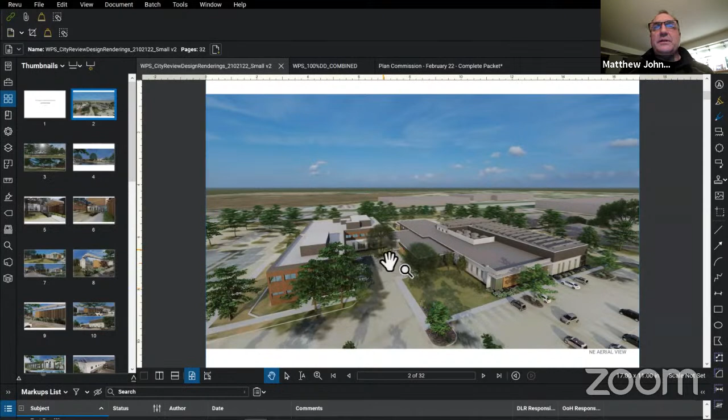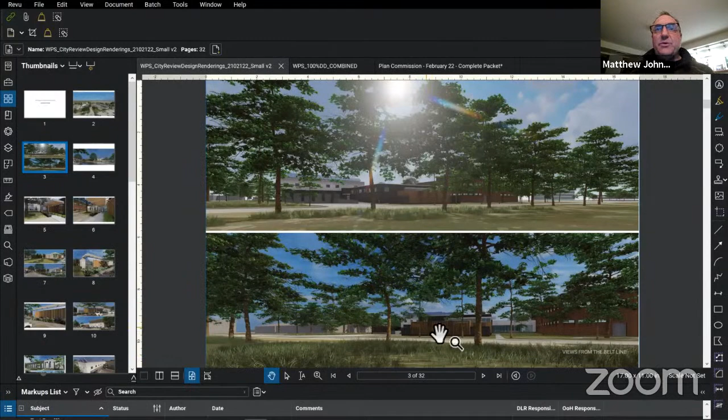As you come all the way to the south of the building, this is kind of standing in those storm ponds to the south across the road, looking at RKB, the imaging portion of the building, and then the central docks. You can see the dock and how it's screened by the trees, roadway, and other materials of the project.

So as you come back to that front north side, the front door, coming in the parking lot from the north—that's the link connecting RKB to the front door. That's the scanning portion of the program for the building, and the solar above that.

The front door itself - this product's called Knotwood. It's an aluminum wood, or a wood image clad on aluminum panels, if you would, or aluminum sticks. And then this is aluminum siding on top of that concrete tilt-up panel.

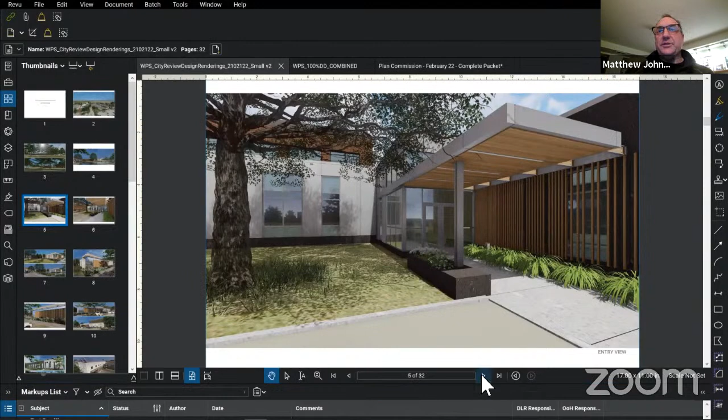This is a secured entrance point, that canopied entry looking back at RKB. So as you're backing up towards the south, the front door or side door, this is the scanning center - this is in the future master plan. This side of the building of this addition is the very campus side of the facility, so really getting this building positioned so it forms that southern edge to the overall campus area.

As you come around the building, highly mirrored glass so you can prevent views in but allow views out still. That keeps secure information secure within the facility itself. This is that knotwood material, and this is the metal panel, and the sunshade is an architectural element.

The fins themselves, this spacing - this is just the 2x2 position close together. As you move toward the right or towards the west, they get further spanned out to create that dynamic finish as you see it from afar.

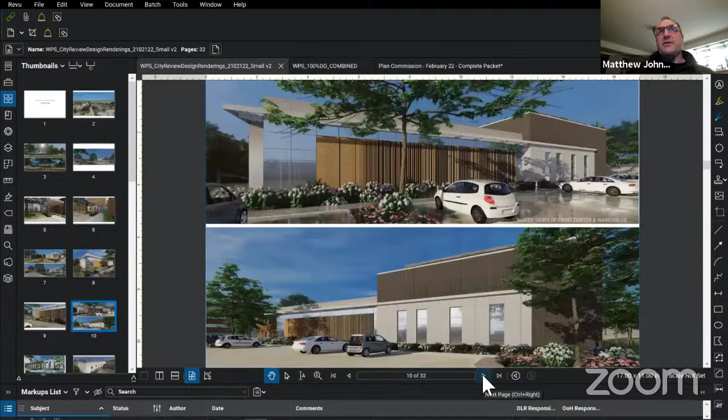As you come around the building, the west side of the building, the material handling part of the building, and the screen for the compactor. And of course the photovoltaic array and the loading dock itself and the dock entrance. So you've got the 4 doors plus an entrance point for the compactor, and then a drive-up door.

The concrete itself, again, it's all tilt-up. It's a ribbed finish, a corrugated finish, a dark color almost black, light textured finish, sandblasted finish.

And as you come around the south, this is the RKB, it's the brick from RKB. This is that break room piece that spans the 2 buildings as part of the link. So it's a way for staff to take a rest from their desk, come out and have some lunch, still stay within a secure environment, but have a view of the outdoors and get some sunshine.

The entire building also has windows up high for the most part to allow daylight in and views out. Again, another view just for that loading dock from Engel Street - so you can see everything's well screened and the views are controlled.

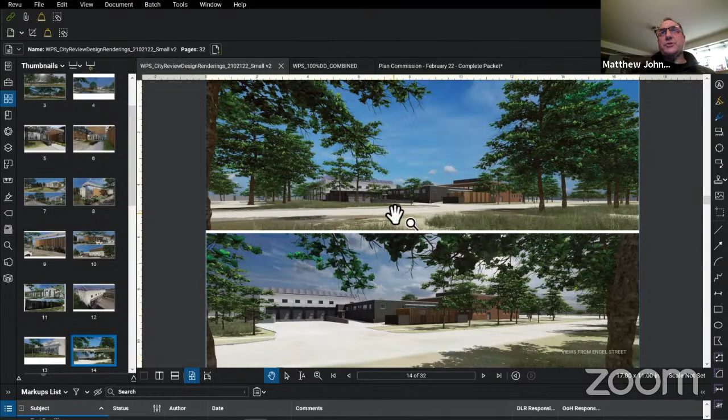So as you look at the materials themselves for the building, the base of the building is the tilt-up concrete, which is site cast. Down low it's a blasted finish, a sandblasted finish, then the ribbed, and there's alternating ribbed and flat finish with reveals.

Then you have metal panel with an architectural louver above. In the south, more of a sunscreen, as in the north it's an architectural element. We have some louvered finish as well as part of that linking connection on the south side by the break room.

And then the knotwood - it's in 2 shapes and also 2 colors. So we have the darker finish out near the compactor, and the lighter finish is what you see around the building articulation by the front door, et cetera. That's where it's the 2x2 sticks as well as the 2x6 louvered piece that's at an angle, which is around the compactor and the generator enclosure. That really provides a deeper screen of equipment behind that wall.

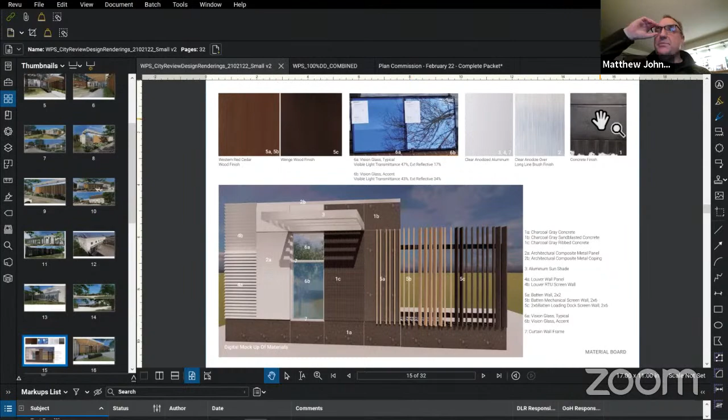Let me go back - so that's the actual finish, red cedar, the wenge, and here's the actual glass samples, the metal samples. And this is an actual mock-up of that black, and we're testing out some of the coloration as well as some of the corrugation that it could be. These are samples actually set up on the dock area at RKB as well, if you're going to go see it. And we have another full mock-up in process as well that's bigger to scale.

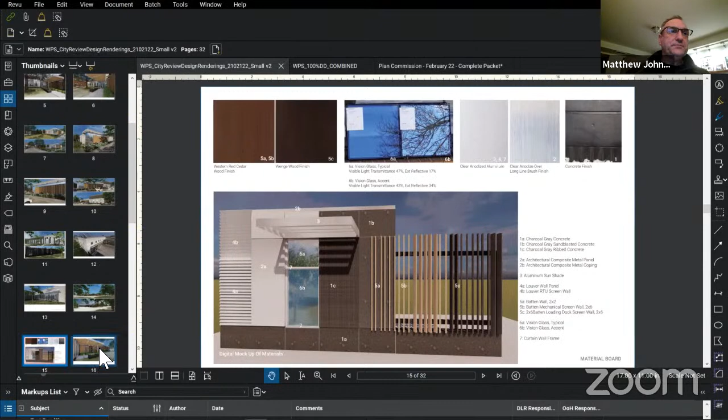And then back to that front door - that's where you see the articulation of that. It's called knotwood, this metal material, and the architectural concrete and the corrugation and the sandblasted finish. So that's the high level view of the building itself and some of the finishes we're using.

Scott Ayers is also on the phone if you have any specific questions regarding the engineering review that's taken place. At a high level, it all seems reasonable and easy for us to respond to, even the increased pond size on the west side. So we're looking forward to any questions or feedback you may have.

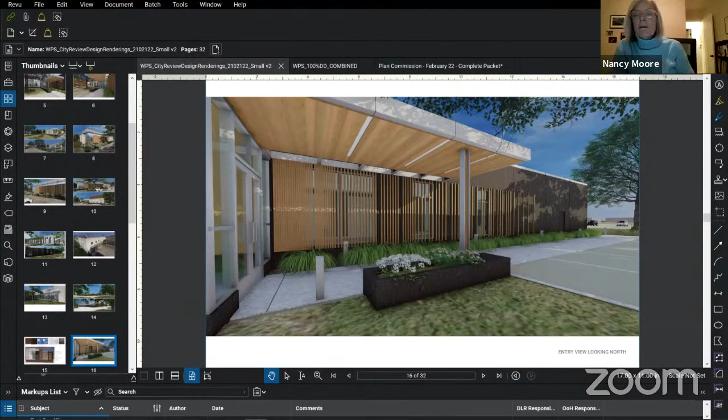Hearing none, we'll close the public hearing and move to 5B, consideration of action on the request by Wisconsin Physicians Service, WPS, represented by DLR Group for approval of the zoning permit for new construction at 1765 West Broadway, case number 2-002-2021.

Rob, I'll be abstaining. Okay, thank you. Anything else? Well, first, before in case anyone else was going to present, I'll turn it over to you, Doug.

Thank you. I can just give a couple highlights from the staff report that was included in the packet. So this is a 43,500 square foot administrative services building. A pre-hearing conference was held on January 11th, with generally very positive feedback. Plans have changed minimally since then.

As with the ordinance, the public hearing notice was mailed to adjacent property owners. The parking proposed is below code in terms of square footage, but the applicant does propose adding 27 parking stalls along both the northern and eastern perimeter of the site. As noted in the engineering report, the submitted plans have no ADA stalls, but

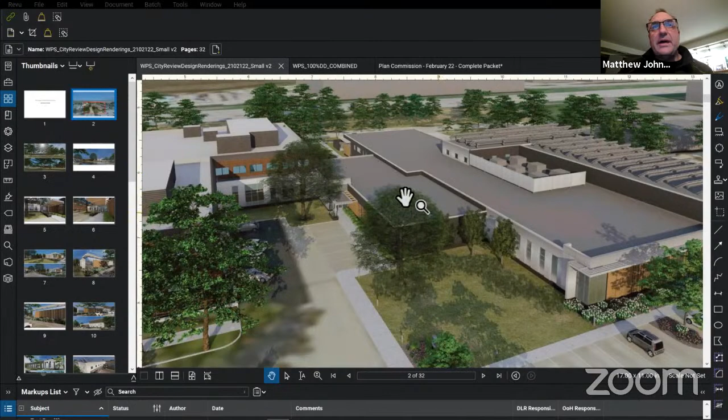So the entire structure of the building is tilt-up concrete. That's how we clad the actual material itself. As I zoom in, the entire length is the metal panel, as well as that front door. There's cladding around this mass, and then the metal panel is really all around this lower story. Then the knotwood here, as well as the glass curtain wall system. As you look at the upper piece, this is all that screen wall, the screen system, the louvered system for the mechanical equipment, and that's metal panel as well on the central dock area.

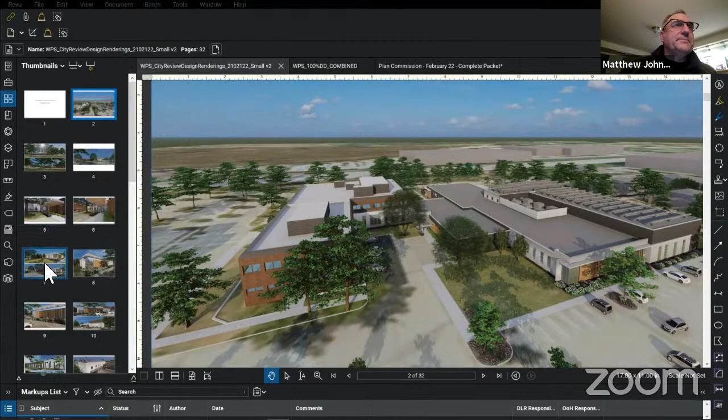And as we come around the building, here's a little closer view of that link. That's the concrete, and then it's all metal. This is on the north side as you go all the way through past the material handling space.

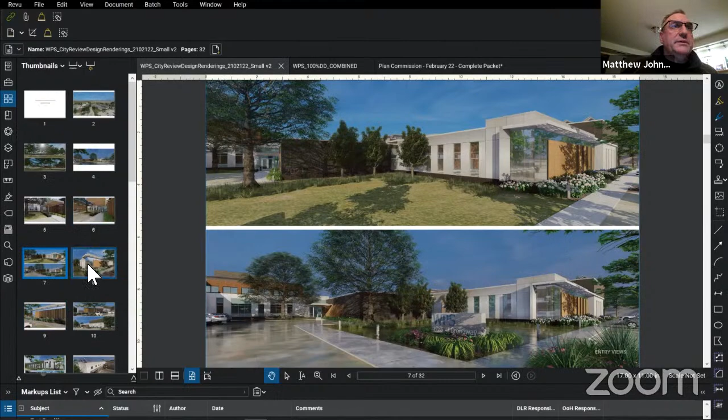By the way, this is probably a great spot for EV connectivity, either here, probably here, because it's most accessible to a greater number of people versus the smaller parking lot in here, but very easy to respond to as well. As you come around the building, again, this is all metal panel.

Then we've got a base to the building, and that base is the dark material, dark concrete. So it's got something to sit on, if you would. It's of strength, the knotwood.

Then as you come around the building, this is the west side. This is where the pond is. That's where we've mixed in the smooth finish, the corrugated finish, as well as the metal panel itself and glazing. So it's a very varied entire facade. It's got a lot of texture to it, contrasting materials, as well as landscape.

Could I ask, while you're on that page, the lighter color material, is that cladding or concrete? This is the metal. So the only concrete is the dark color I see? Correct.

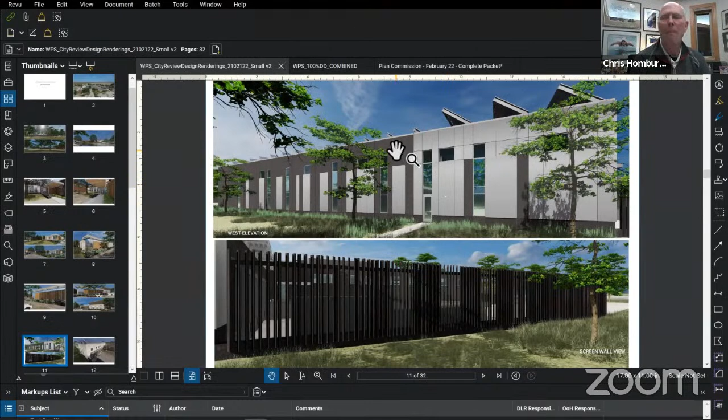Thank you. And it's going to be a sandblasted finish, it'll have a little texture to it. And then the reveals themselves will be not sandblasted. They'll have a little more of a gloss finish to them, but it'd be the same color, and they'll appear a little darker because they're not sandblasted. So you sandblast the concrete, it gets a little dull sheen to it.

And Matt, this is Ken Roseth. If I could add real quick, the reason for a lot of the different materials in this facility is these three areas need to be resistant to tornadoes, shear winds, and things that affect us every day. So this building has a structure that's very strong. The data center is going to be built to some of the tier 3 standards that are required to keep that data center running no matter what happens to the rest of the building. So yeah, some of the metal panels might shear off, or the knotwood may shear off, but the building itself will withstand those kind of things. That is for disaster recovery, and we need that as a company to keep our operations going.

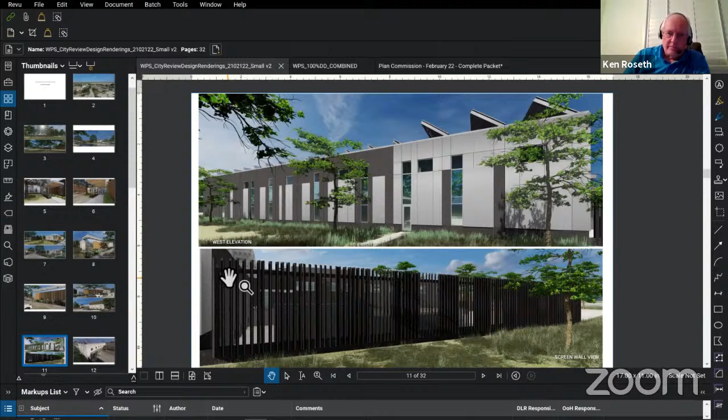So as you come around the building, this dark screen is really trying to reflect the darkness of the building. So again, it's more of a homogeneous color to it. It's got the material, it's got a texture to it because of the slats, and then because of their pivot, it also provides a higher level of screening ability.

And as you come again to the southwest of the building, the loading dock, the screen, this is all metal panel. And this is the concrete with the architectural finish on it.

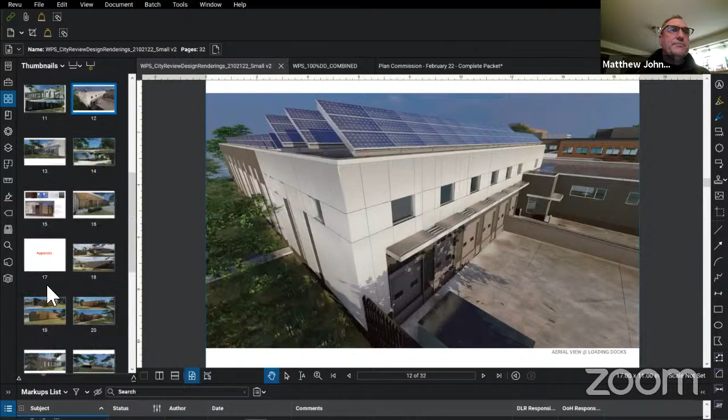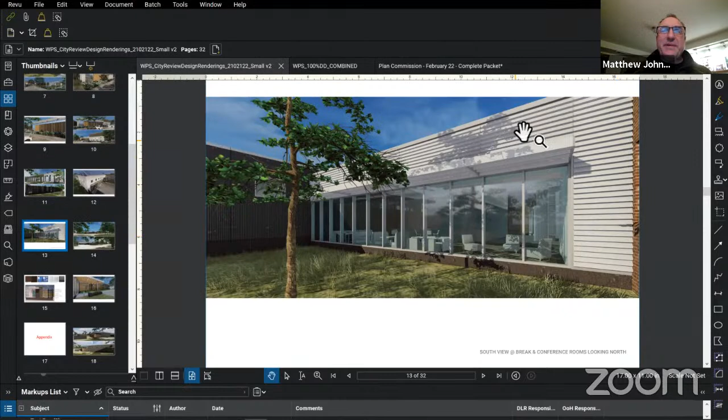This whole idea is to portray a technology building, a modern building. It's a good kind of edge to their campus as time goes on. And then back to the front door, this is that same knotwood, but used as a ceiling material, the wider flange material, and then utilizing the slats themselves as a way to just articulate and kind of soften the edge of that concrete.

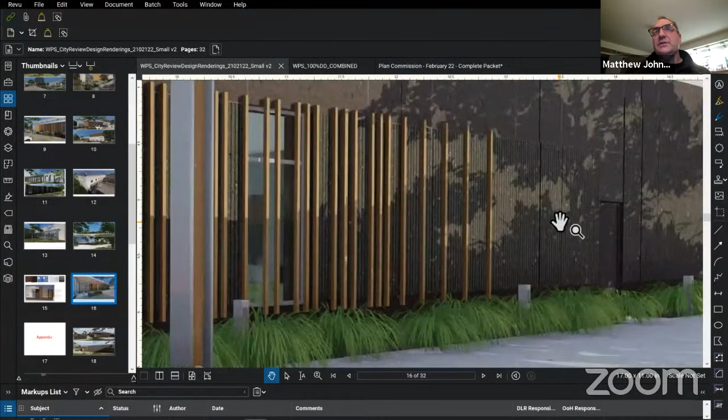If you zoom in, you can see where the panels, the wood, how it's mounted to the wall, and then the corrugation texture as well, and then just the smooth finish.

To address the electric vehicle charging stations, we have 4 of them right now currently in the Nordby ramp. And if the Nordby building is sold, those will be moved over here to just where Matt had indicated they would be.

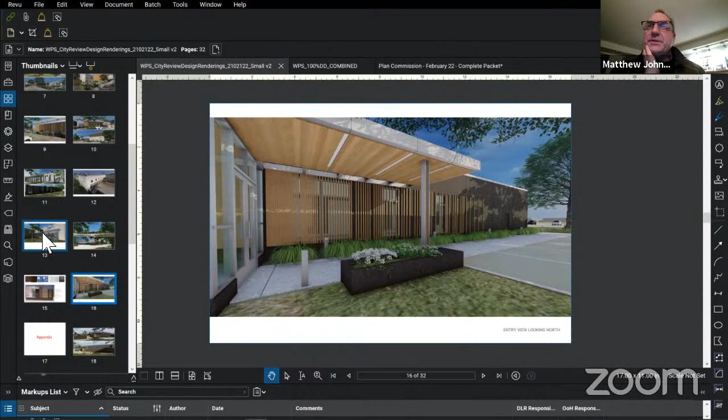The other thing to clarify, in terms of materials on the campus, the Nordby building is a concrete panel building. So it happens to be white, but it's a material that does exist on the campus. So we don't think we're foreign from material selection for this building. We just felt that this coloration and use of metal like we're doing now just portrays that higher tech feel that WPS is looking for in their next campus building.

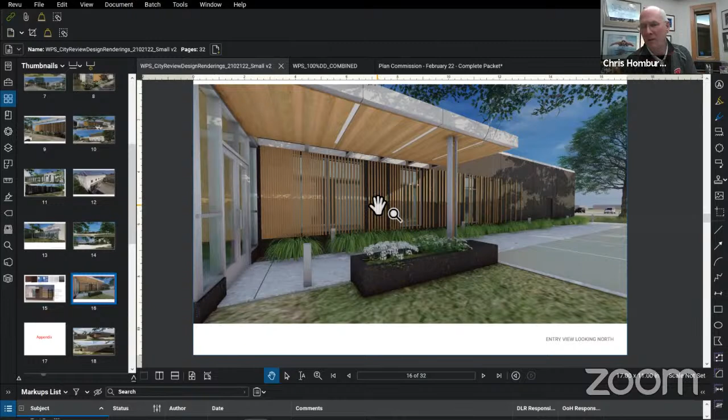Okay, this helps me quite a bit. It is difficult to read them. I think whatever panel you call that with the more wood color, I think that helps tie the color palettes in a little bit to the existing buildings. I think a lot of the primary views, you have the cladding, and that helps a lot.

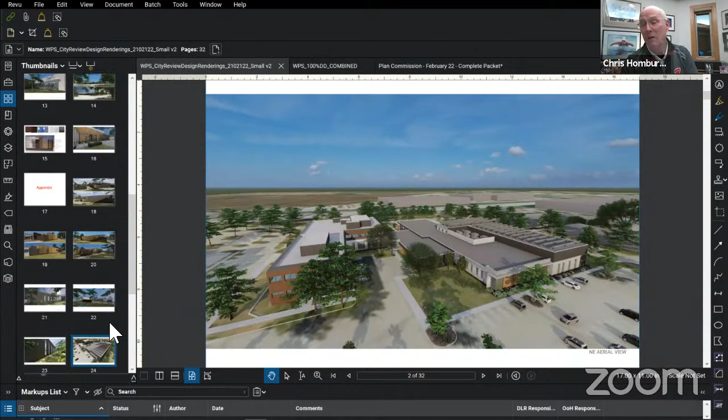I think one place to probably punch up your landscaping might be along that whole west side, because you're taking out a lot of nice trees there, and perhaps where you've got that whole side, which is a lot of concrete there next to the Southtown office park.

Yeah, so I think you're talking about where the pond is. Correct. But when you look at the landscape plan, I think there's one tree at the very south end and one tree at the very north end, and that's about it.

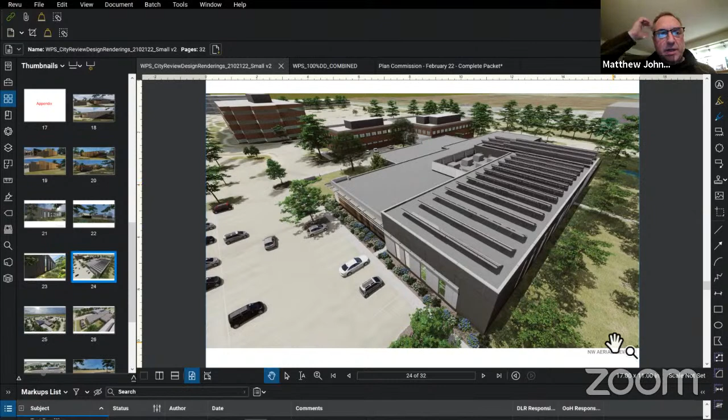Yeah, I think as we further develop this pond in terms of its new size, we can add some additional trees. And even depending on where your different storm events, your 10, your 100 are, you might even have trees on the bank or something if you want to get it far enough away from the building. But I think it would help soften it from the neighbor.

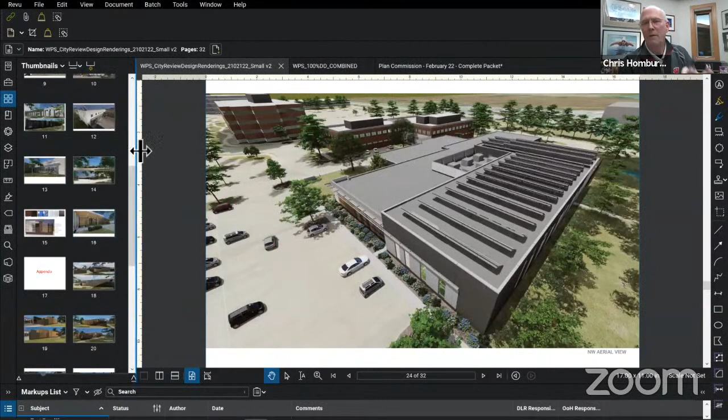And then the other places, depending on what the rest of the commission feels about that screening around the electrical equipment, generator equipment on the south end of the Koenig building, that would certainly be an area to have some saturation of landscaping around that too, to further screen it, as well as the further screening of the loading dock wherever you can accomplish that.

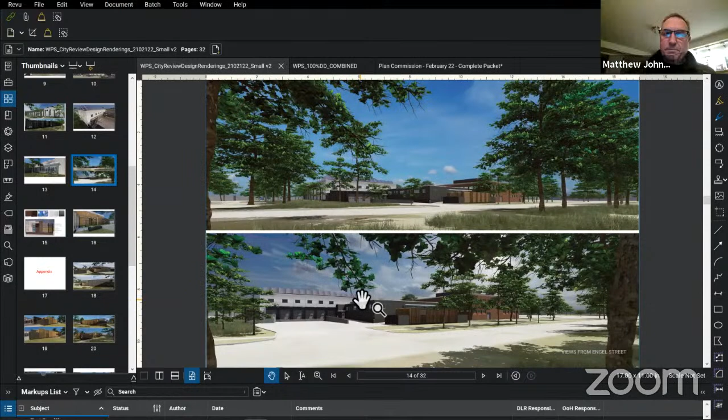But this has helped me, because what I don't want, and I don't think WPS wants, is just to start looking more industrial than office park. And there's in between, there's a business park, there's an industrial park, and then there's really what you have is an office park. And I really hope we can keep this looking like an office park.

I totally agree. And that's one of the fundamental reasons why Newcomb Construction is on the project as well, because their panel is not your typical concrete panel. It's a well cast, articulated, nice architectural finish on it. So again, that's why they picked the dark color, so it doesn't look like precast concrete, but it's just a nice, durable, aesthetic material. It's got a nice, when you sandblast, it's got almost like a soft kind of look to it.

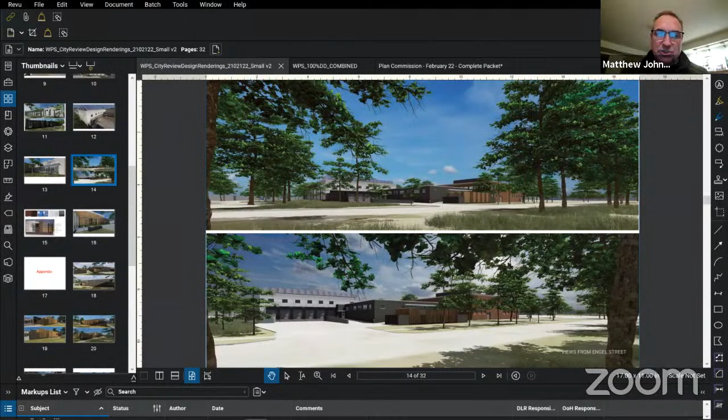It's quite nice. Okay, and then my comment for the EV charging stations was just that it's cheap right now to put it in, and our sustainability committee and our plan commission are both really interested in making sure we're prepared for the future, and that clearly is going to be the future. I don't know when, I don't know your percentage of employees, but it likely will be going up. So it's just a cheap investment that we'd like to see most larger campuses make at this point in time, so we're ready for the future.

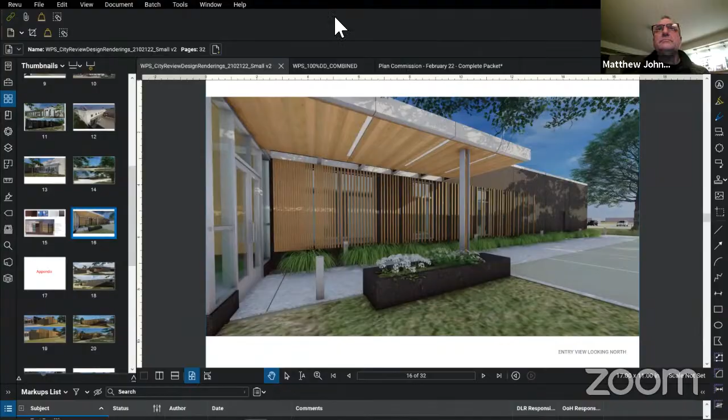Good evening, everyone.

Thank you. That was really helpful to go back and take a look at it again. So thanks for asking for that, Chris, and for doing that. I had just a couple of questions.

In the letter that you submitted, you mentioned that it has a new address to allow it to have flexibility as a standalone facility in the future. And I guess I was just wondering if you could expand on that.

One of the fundamentals when you look at the infrastructure of the buildings, particularly your fiber lines, they require an address to demarc onto. To allow this to exist as a standalone data center, since the whole premise of this project is to upgrade the data facilities within RKB, the best approach was to put them in a new building. The best way to future-proof that is to give it its own address, even though it's connected, so when they bring a new fiber line they have an address to place it to. It's kind of a technical thing. It shouldn't make a difference for most people since they'll enter through the RKB address point, but that's why we've got a new address for this building.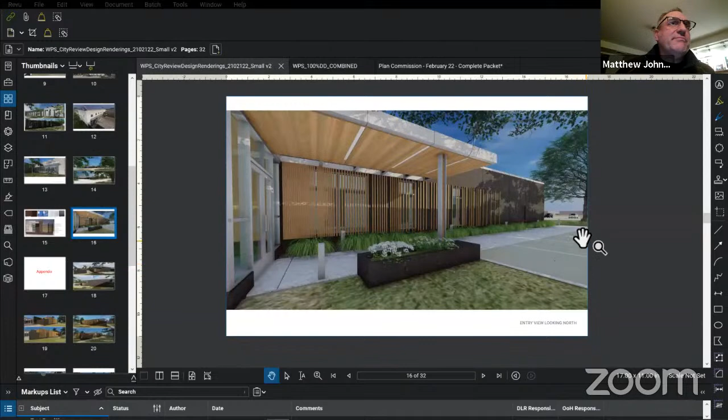I heard in the presentation that you're addressing the ADA parking stall in that area by the new entry. Right to that front door, the side door on the north end. It might be easier if I just share again. We'll be adding the required ADA stalls essentially right in this area. If I zoom back out, that's this parking lot, pretty much in that location. Are you putting in one or two stalls, what's the plan? I think a pair of spots.

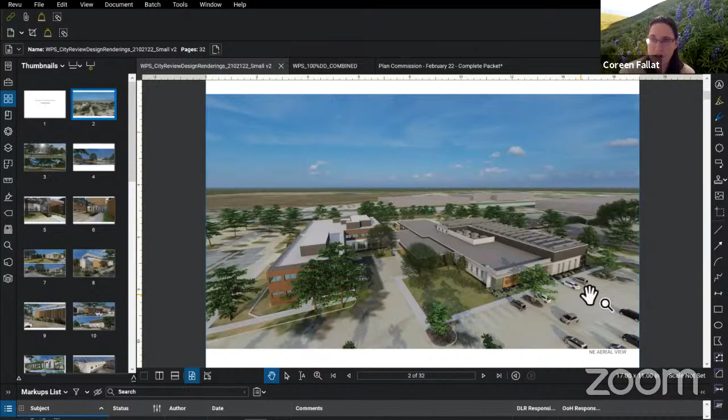My question was about the landscaping as well. I was having a hard time reading this, even with a magnifying glass. I agree with Chris's comments about the west side. It's hard, the renderings are just renderings. I wasn't sure what's in the stormwater planting mix, because it looks like sand dune plants in the renderings, and I know that's not what's there. So I was wondering if you could talk about what a stormwater planting mix is and what it might actually look like, because right now in these pictures it looks scrubby.

I'd probably ask Scott to get more detailed on that. Typically it's more of a tall grass, reed-type material with a longer root that allows moisture to wick into the ground—rainwater garden type foliage, if you would. It needs to be wet tolerant, so they tend to have deeper roots. I don't have the exact mix in front of me, and our landscape architect isn't on this call, but it's generally a wet-type seeding or plugs. What's on our plan may change a bit with our stormwater pond revision, which will make it more of a biofilter at the bottom of the basin. If you're familiar with rain garden type mixes and plantings, that's what it'd be like. I do echo Chris's comments about thinking a bit more about that west side and maybe breaking it up—I know it'll be hard since it needs to withstand that moisture.

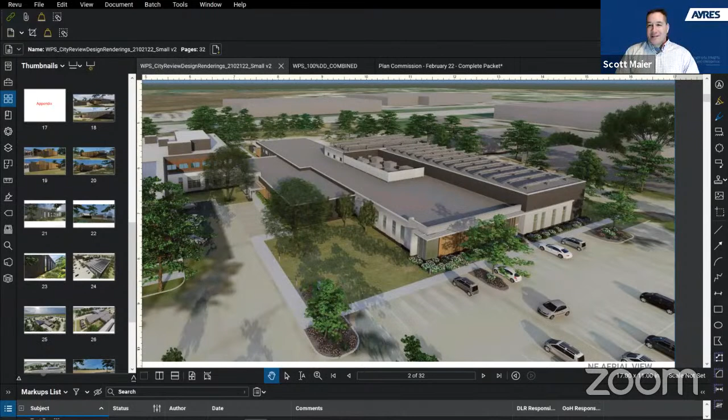Rob can't really say anything, but he would have some input. What are my limitations here? Can I give a general question or answer? If I may, Madam Chair, he's abstaining but we can ask him for technical questions. We're certainly allowed for him to give us technical feedback. Just about to say, yes you can, as Chris has done in the past and others have done for a technical question—Rob, go ahead.

Generally speaking, in a situation like this we'll do a mix of sedges and native grasses, depending on the desired effect—they could be low to tall grasses. Depending on the ornamentation, a certain percentage of forbs or native plants can be added, some of which you might see elsewhere in the landscape—rudbeckia, echinacea, sometimes cardinal flower are examples sometimes thrown in the mix. But as Scott alluded to, it's usually a lot of plugs of sedges and native grasses, because the sedges create a lower base layer and the grasses are taller, working in concert with one another, and selecting certain forbs just sprinkles in color. So if some of the taller grasses would break that up, more than the shorter ones—I don't know what page it was, let me see.

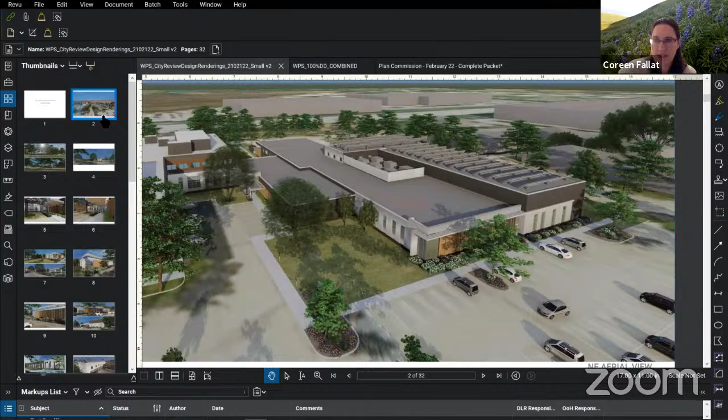Well, one of the pictures just looked like real low grass. Yeah, and it's just the software generating a fictitious plant for those grasses.

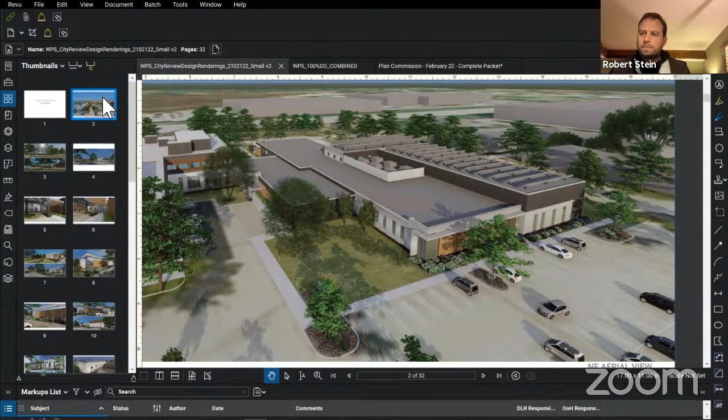I'm familiar with the software used to create it, and some of the plants are depicted as more realistic, like the ones we're looking at right now, the hydrangeas in the front. Pretty good representation. The other ones populate just kind of a generic grass.

All right, well, sounds like you have a plan for that, and Chris suggested some trees, so I'll leave it there. The other comment I had was related to the screening, and it says that the mechanical should be fully screened. I don't know how the commission has interpreted fully screened in the past, if that means you can't see through it, or if it just means it has to be completely surrounded by whatever the material is. I don't know if anyone has a sense for how we've interpreted that in the past. That would maybe be helpful.

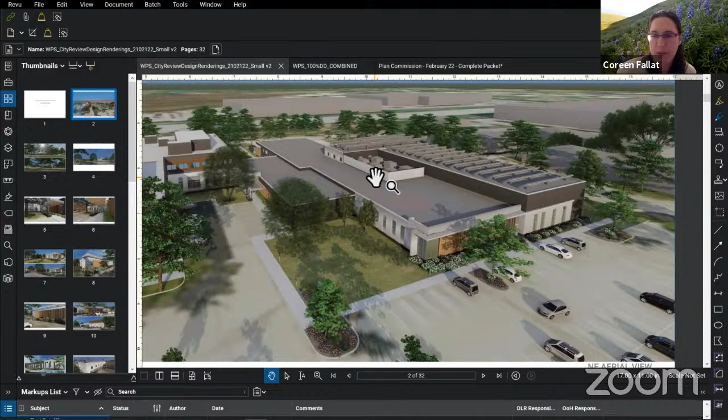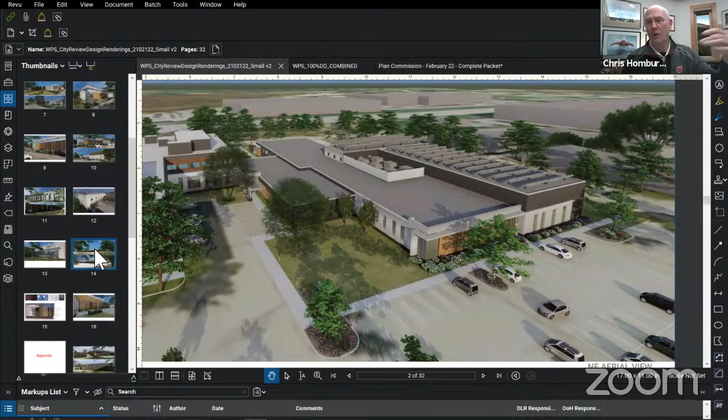Chris, would you like to respond to that? Sure, I have a sense for that. Fully screened in the past, we've considered fully screened as not seen through a chain link or slats, which is why I suggested, if the commission is satisfied with that slat type screening in the front of the building, towards the belt line, towards the angle, then we would normally ask for a pretty good saturation of landscaping around that. So you may see through in individual areas, but you have to really, really look to see through. It takes your eye away from it.

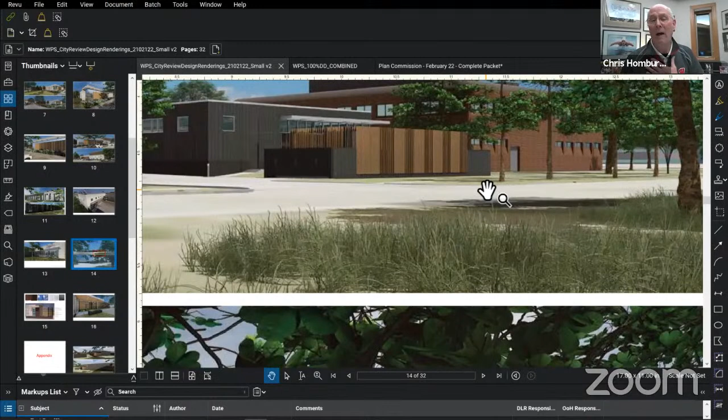To have just the screening, it depends on the opacity of it. That would be my best answer. If you can barely see through it, then it's fully screened. But I think there should be some landscaping around that enclosure, and it would depend on the opacity of the enclosure and how much.

Okay, yeah, thanks. And if I could clarify, all that's behind this screen is that large generator. But behind the more opaque screen is where the transformer is, which is fully screened. And then the switch gear, there's a firewall, and on the other side of the generator against the building is where the equipment panels are.

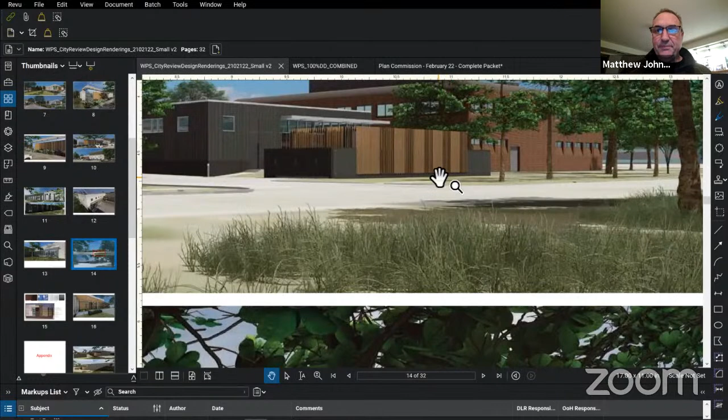So the generator already has an enclosure it sits in, and we're hearing from MG&E their requirements for enough ventilation around that generator for supply and exhaust, so we get concerned that if we put a solid panel around it, we'll have larger issues long term. So we want to try to maintain some level of airflow through it. But the equipment behind it is big, almost like a shipping container, which is what it looks like, and we'll paint it again so it'll blend right in.

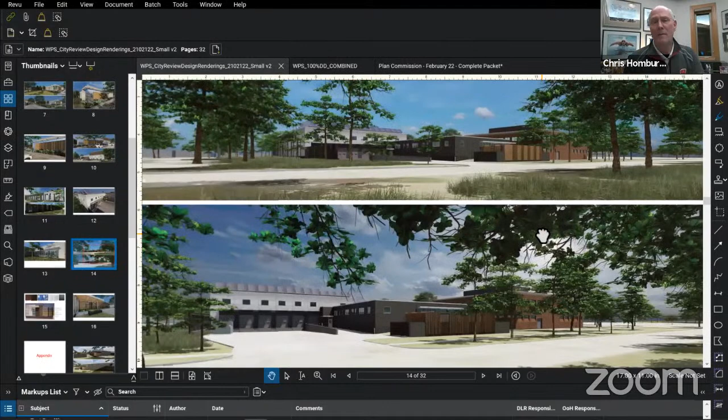Okay, so I'm not trying to take over, Kareem, but if I could add my two cents - a little landscaping. One thing I like about the enclosure you showed us, and it doesn't show up on the drawings we have, is it pulls the colors in from the Koenig building. I like that we're kind of getting some colors going in, but I would still say there's one area for some landscaping, just don't block it out, because it's nice to see those colors.

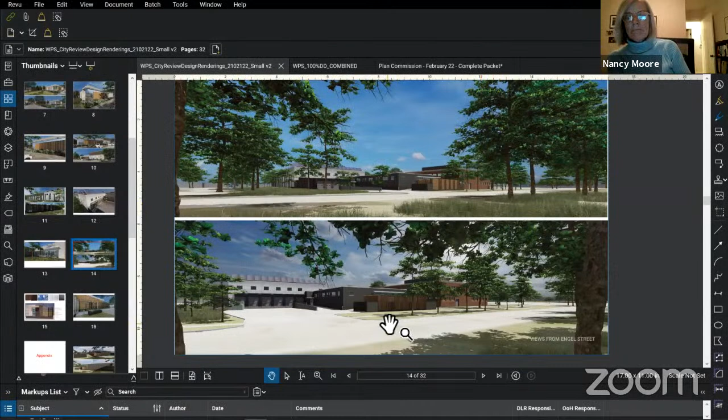Yeah. Right, I'm good, thanks. You're good? Yep. Okay, great, thank you. Next up, Kristie.

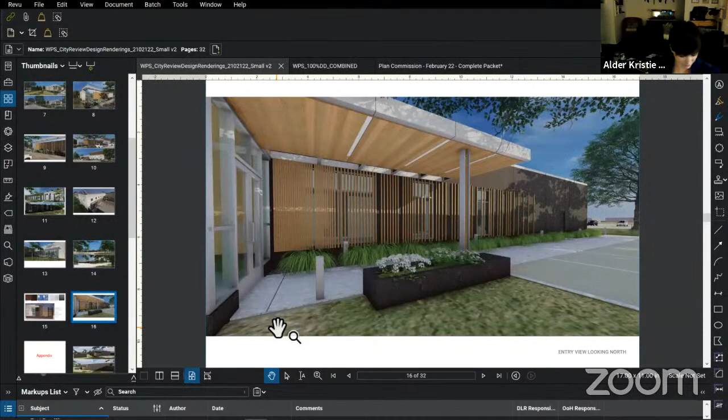Yeah, most of my concerns have been addressed - the ADA stalls, the trees, the grasses. I really do like the contemporary style, I think it's a really good look.

I was wondering if, with the conduit for the charging stations, you might consider accommodations for e-bikes as well. E-bike sales have skyrocketed, and a lot of organizations are putting in accommodations for that.

I saw that you wrote letters to the neighbors about the construction, and I was wondering if the letters went to the property owner, Brad Riemann, the office complex next door, or did they go to the individual tenants of the businesses there? Because it's pretty close to where you'll be doing construction, and when you start, it doesn't look like any of the trees will be leafed out, so I would think it might get a little noisy, and I just want to mitigate any issues there.

So I can respond to that. The city sends out the notice, and it goes to the address itself of the property, but the contact person addressed is the person on the tax ID. So it may well be an LLC or something like that, but it goes to each of those properties. And sometimes if it's obvious or visible, I will send it to someone if it's an out-of-town landlord or something like that, so they're aware, and really try to cover bases.

It may be more difficult in a multi-tenant space, but that's the practice I inherited and carried on.

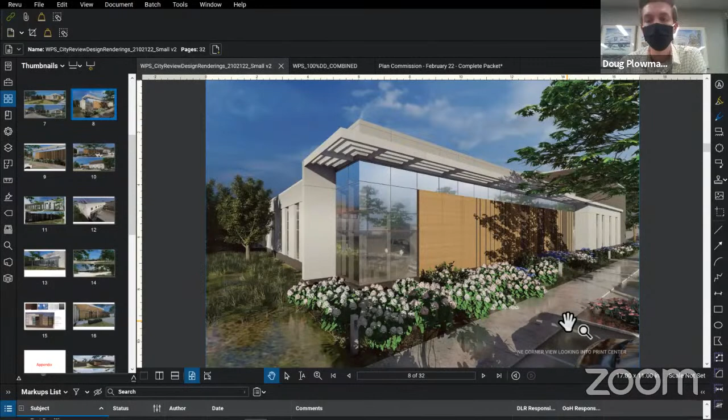Okay, that sounds good. I just wanted to make sure it might be good to double check with Brad again that he's contacted all of the tenants. Yeah, that's really all I have.

So yeah, it looks great. I can't wait to take a tour. Hopefully you'll give a tour. Yeah, definitely. Thank you. Thank you, Kristie.

Any questions I had, I was interested in the brick also, but just seeing the look again, I do like the look of this. I think it works well. I guess I'd just echo the landscaping, I think that'd make a huge difference. And I think the screening on the roof is also louvered, and that looks okay to me. It looks reasonably opaque, so I really don't have any other questions. I think it looks great.

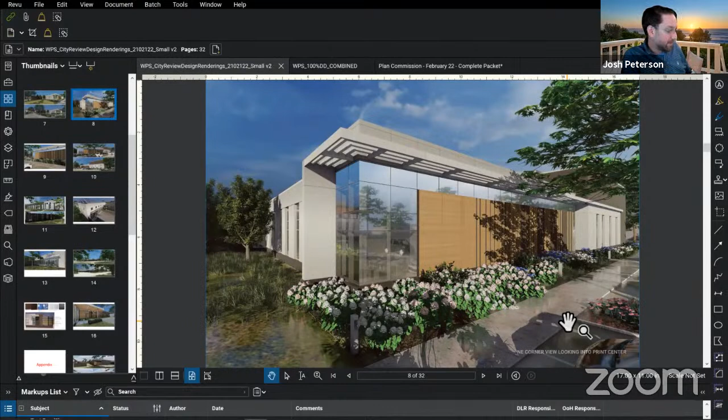Thank you, Josh. Not a lot to add. Commissioners, for the most part, covered it. Building looks great, I'm excited about the addition to the campus. Kudos for the solar array on the roof. Good catch, Chris, on the EV charging stations. And Kristie, I like the e-bike concept too. So, thanks.

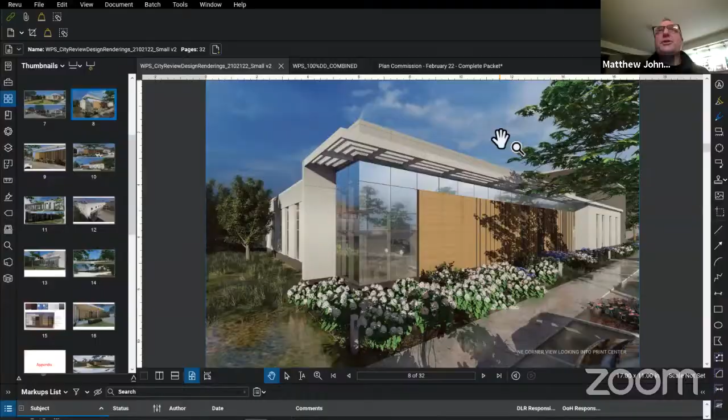Can we come back to the full screen so I can see everybody? Oh, I'm sorry. Sure, that's all right. Just want to make sure I haven't missed anybody.

And I actually had a question, not surprisingly, I'm also going to say kudos for the solar. I would expect no less from WPS, of course. But I am also curious as to why the solar, it seems like the largest piece of the roof doesn't have anything on it. And for that matter, the RKB building, is there any thought at the same time, or have you given any thought to putting some solar on there too? It seems like this is a building that's going to be sucking lots of energy.

In processing, among other things, right? Because it's going to be going a lot. From what you guys described in the pre-hearing, you're going to be cranking out a lot there, so I'm just curious why the whole roof wasn't treated that way.

Well, this was an initial stab at solar, and we wanted to put it over a portion of the building where we wouldn't have much risk. Obviously there's people on the roof after putting in the solar, and we don't need leaks above any of the processing, the EOB air print mail area, the data area, or the scanning area—those three are pretty critical. So we started with this piece of it, feeling this was the largest piece we'd be able to put a solar array on that's uninterrupted.